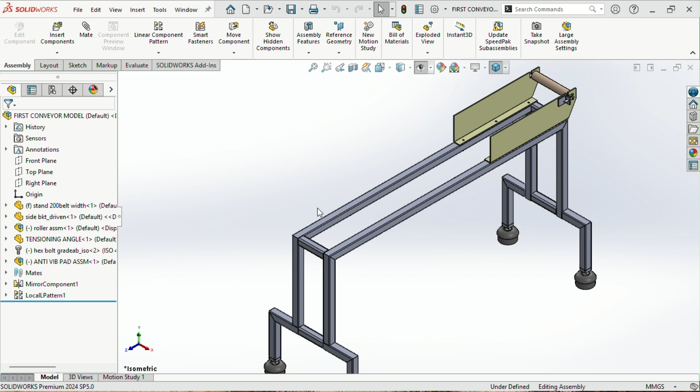Now if we discuss the difference between the carrying roller and the drive roller, carrying rollers means the idler roller and the driven roller, which we will design later. The idler roller supports the belt and rotates freely. There is no power transmission, and the load is lower. But the drive roller is connected directly to the motor, so it transmits the torque, has higher loading, and requires stronger mounting than the driven or any other rollers.

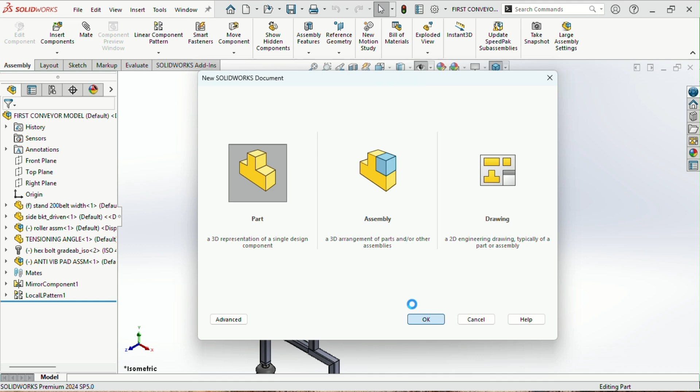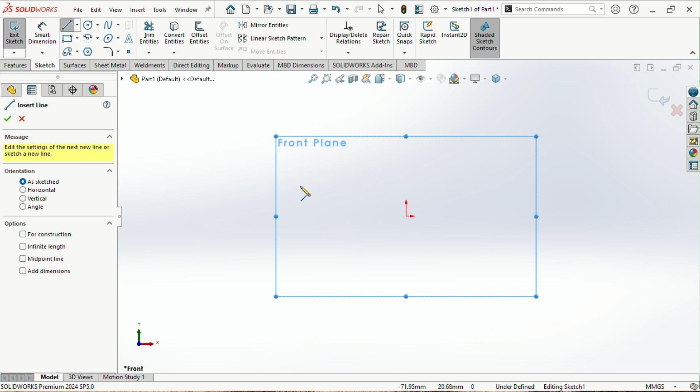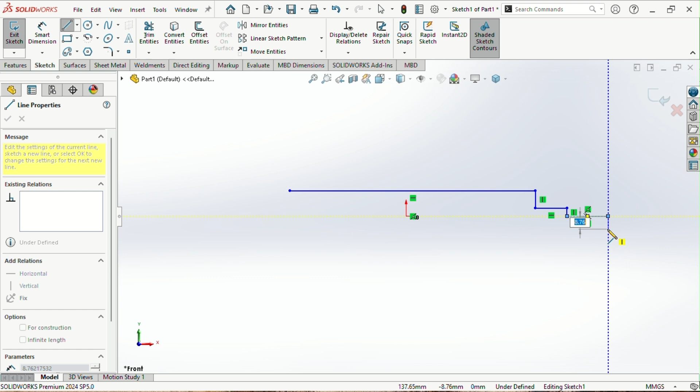Okay, so first we will make the drive roller, then we will use the idler roller similar to the driven roller. So let's start. Go to the file and make a part. Here we are considering the bearings, that we will mount the bearing at the external part of the roller. So first go to the front plane, create the sketch. Now this is the main body of the roller, this will be the bearing part. Let's just draw the roller, then we will remove if we don't want anything.

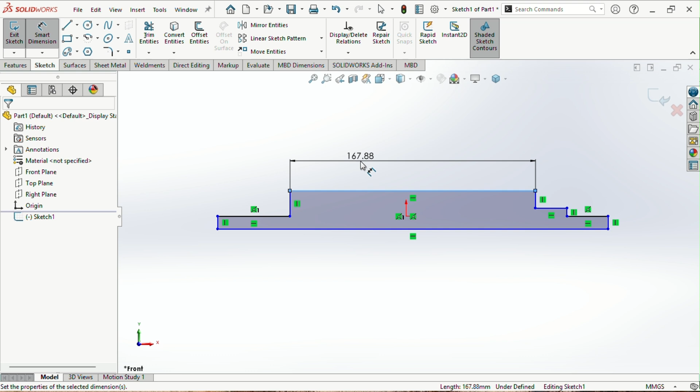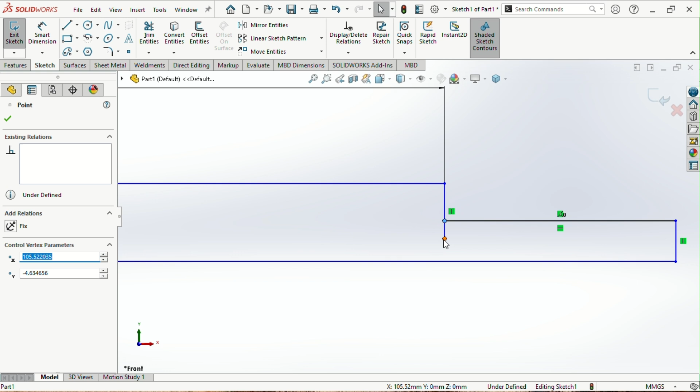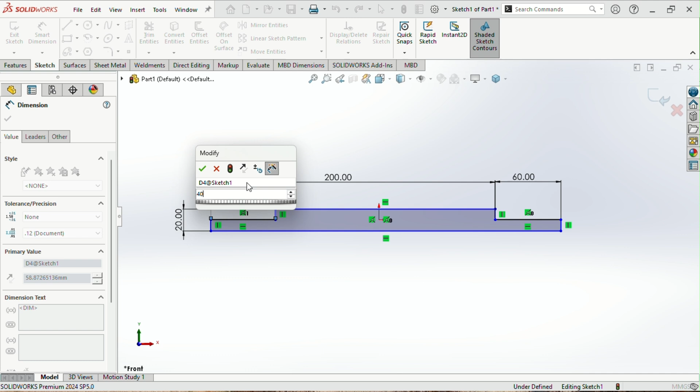First of all, this roller will be directly connected to the motor gearbox. So let's make the dimensions. It's 200, I think. Roller diameter was, I think, 40 mm, so it's 20. I think we should remove this one. Now this one will be connected to the motor, so this will be quite bigger in size. Let's say it's 60 for now, we will change it later. And this side will be on the bearing, so we will consider it as 40 mm. We can change the dimensions, that's why I am just putting the values approximately.

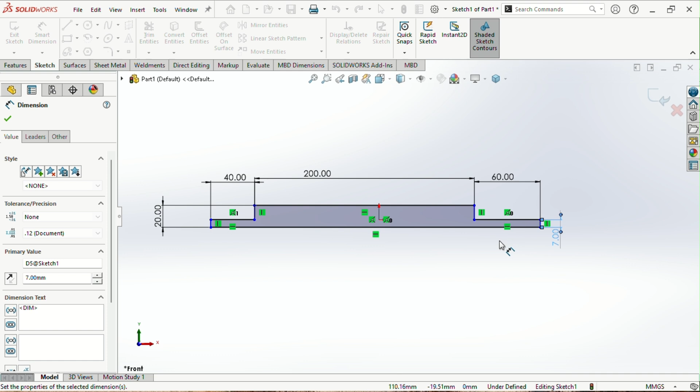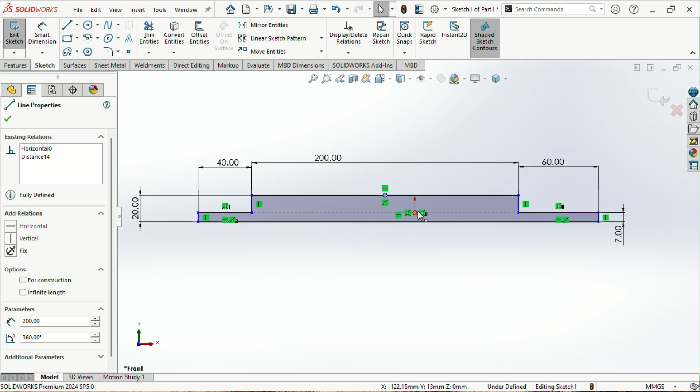Let's take 7, because sometimes the 14 diameter is standard. We will check this also in the next video, how to select the bearing and which bearing is suitable for this RPM and the load. And one more important thing is the motor and gearbox selection for any conveyor system. We will do that later in the upcoming videos.

I hope you are doing well, you are practicing something, you are learning something.

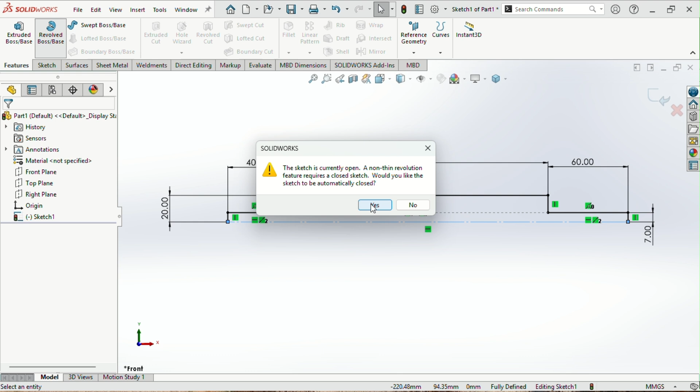Okay, something is wrong. I think we should close this and directly see how it is. Okay, it's working.

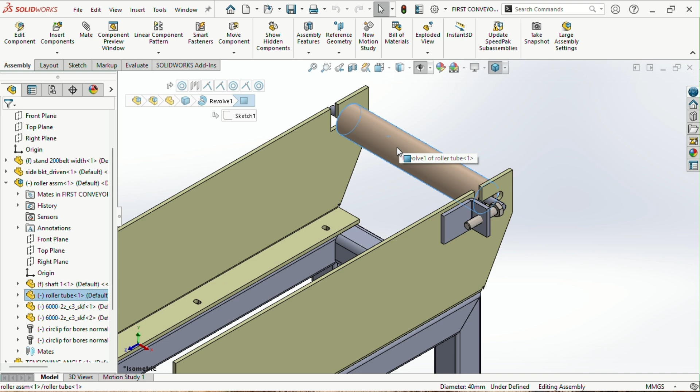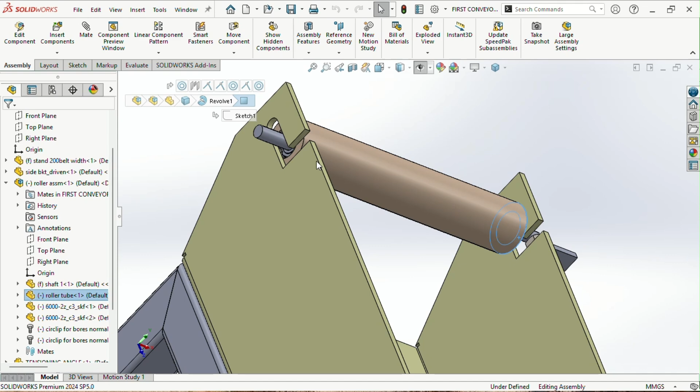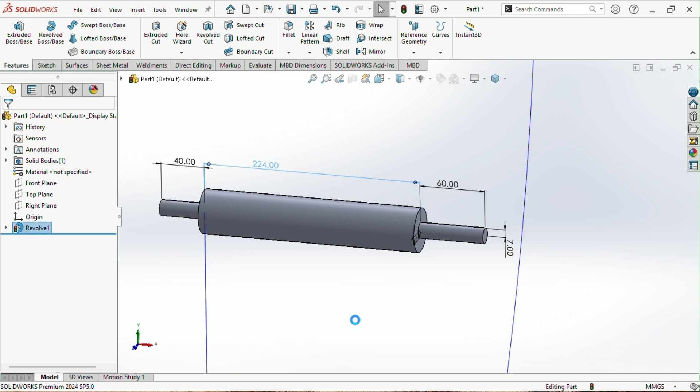Let's check our driven roller size. So friends, the diameter we have chosen is 40, and for the drive roller also we will use 40 diameter, and the length will be the same. The length was bigger than 200, 224. So let's quickly change this to 224. We may need some changes sometimes, because the bearing sizes and the gearbox sizes need to be chosen from the standards. So this is the drive roller. Let's save this.

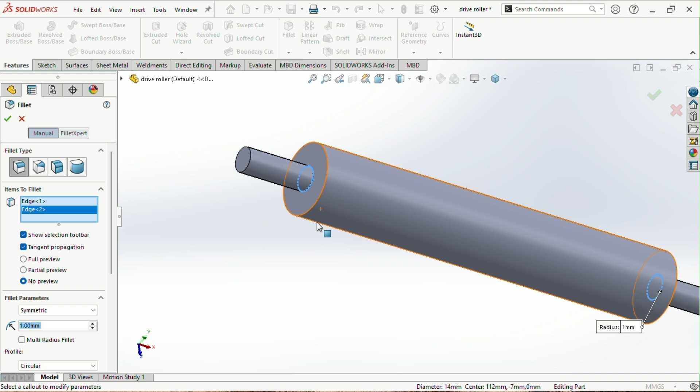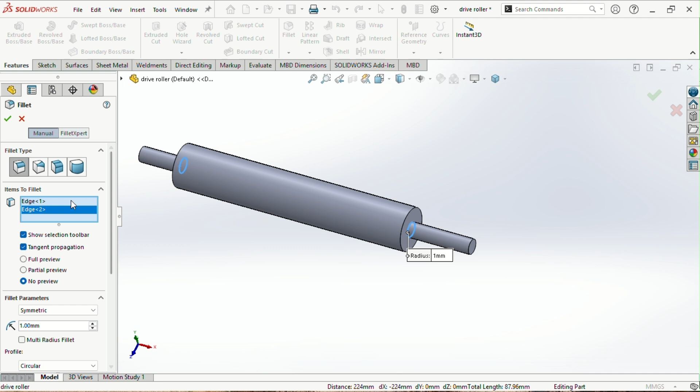Okay, now this is a simple drive roller. We will add the fillet, because a fillet is important when you design any cylindrical part which has a torque. Then torsional stress will be there. So at this point there are sometimes chances to break because of more torsional stresses induced. We are transferring the torque from this side to this side, and this is a solid roller, so the mass of this roller at the center is bigger than at the side. Okay, so this is the basic.

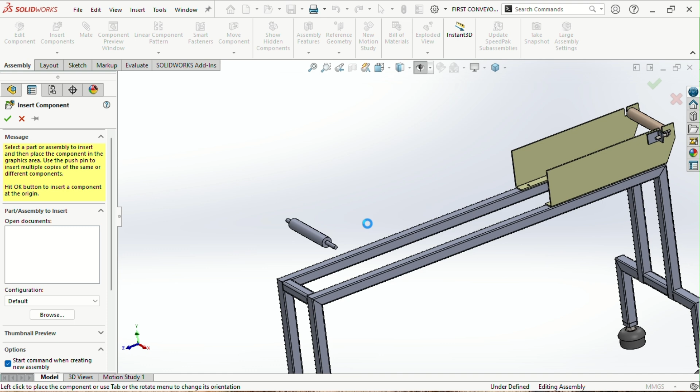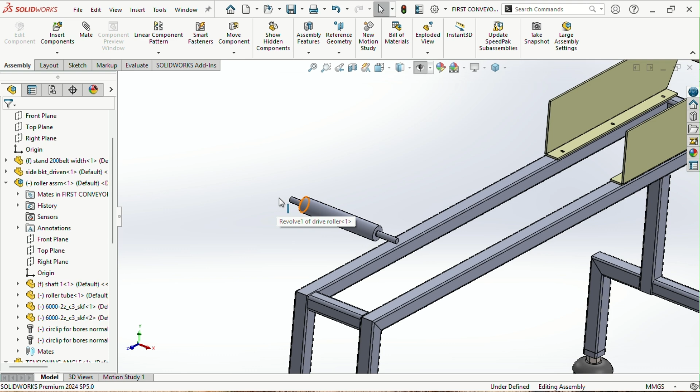Let's save this. We will add this roller to the assembly. We have to design our exit bracket for this, but we will design the exit bracket in the next video, and after that we will decide the bearings which will be mounted on both sides, the housing, and the motor and gearbox selection, so that the basic structure of our conveyor will be complete. Then we can calculate the other things required for better understanding. Because we are not only assembling the conveyor, we will understand why this is taken as 40, what the torque was, how the material will flow, and some formulas required to design a conveyor mechanism.